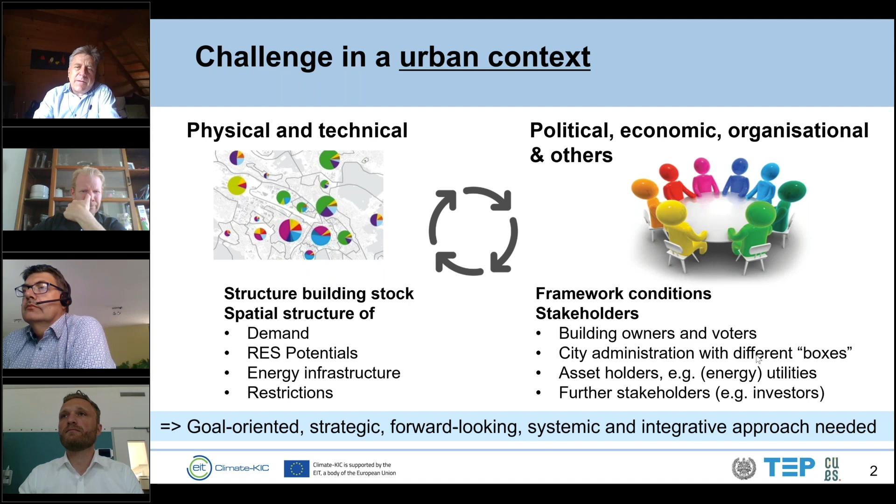If I go to the next slide, so typically, starting in Zurich, but also in other cities, who do you need to bring to the table? Of course, if you have an urban energy planner, it's already good because then you have a certain institutional backup already. If not, it might be worthwhile to think of creating such a position. But on the left-hand side, it's the urban planner, the Department of Construction, the Department of construction permits, the energy utilities, and I think that's very important to think of.

The energy utility that might provide 98% of gas in some countries. How can you bring them to the table so that they see decarbonization not as a threat but rather as an opportunity? You might have other utilities like wastewater, waste incineration. Sometimes they are city-owned, sometimes they're external, but they need to be part of the discussion, part of the solution, as well as the environmental department.

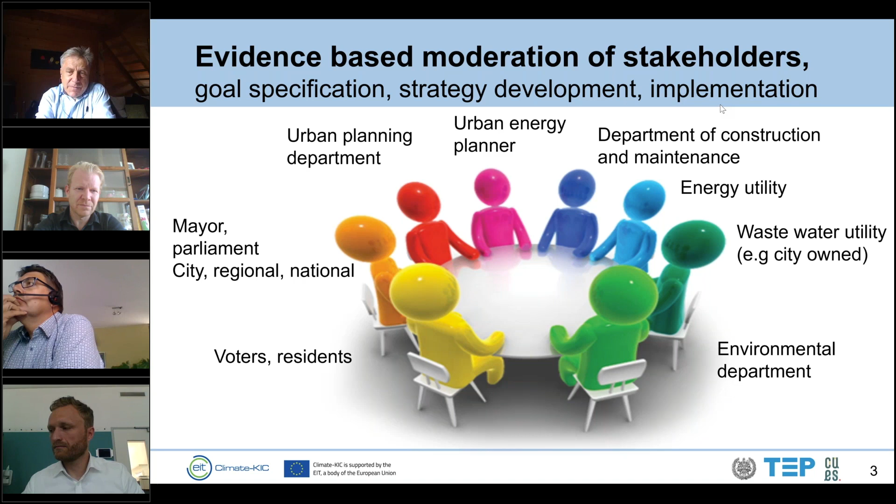They need to foster and emphasize different environmental aspects, including actually the health of the citizens, the local climate. You mentioned it for Vienna, to make also the comfort outside of the buildings good. And if you have all that on the institutional side, then on the political side, you need the voters, the residents. You have mentioned it, Adrian, because they are finally electing the mayor, and only if you can convince them, provide benefits to them, can you implement the advanced policies that are needed to restructure the buildings and the cities, I should say.

So here just an example of the city of Zurich, how the process was then structured. The message here is not that you grasp all the details, but that you need a structured approach. You need to have the specialists that meet maybe more frequently. You need to have the generalists, as we call them here, that in their everyday life have other tasks. But still, if you can interact with the urban planner and make him aware that energy and urban planning might be either conflicting or even beneficial, then this would also foster developments that help make the buildings and cities more green.

And at a higher level, the rhythm of changing things, of approving things is, you don't need to back up every little decision, but at some point you need to back up strategic decisions. You need to back up goals on the political level, including the mayor or even the voters. And this organization has proved to be quite effective in the case of Zurich.

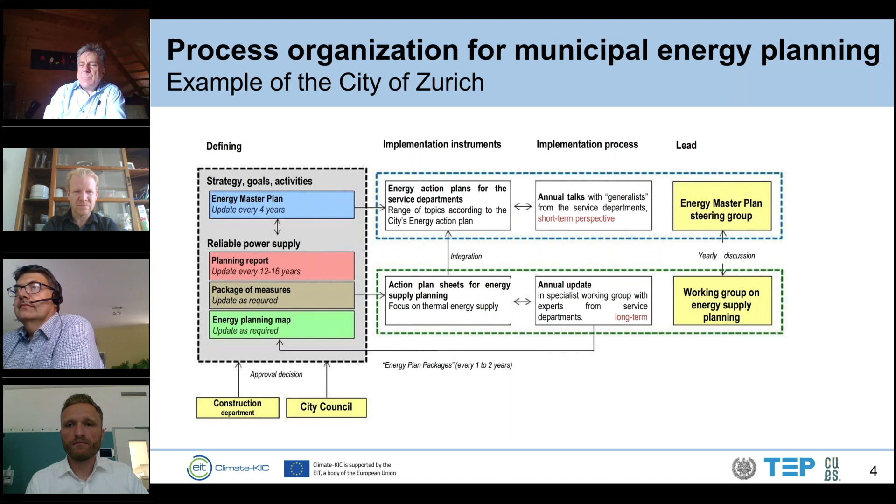It might be quite different in detail in other cities, of course, but the principle is to have a structure to bring the different stakeholders of different departments together, because the silos are not designed to make cities green. The administrative silos are designed for other purposes, but you don't necessarily need to break up silos; you need to make silos work together, I would say.

Then what I call the municipal energy planning, I think again, what is needed is a structured approach. You need distinct products in the end that are really tangible. In this example, it could come out with a planning map, a planning report, and really measures.

That's on the planning side of the medal, and on the right hand side, of course, you need then the implementation. You need the information. You need the involvement of the public. And concrete measures that really make a change are needed in such a process.

And this framework I'm showing here on this slide was developed in Switzerland and applied in many municipalities and cities, and has proved that this actually helps to organize cities around this topic I was mentioning before. And with a clear product, clear methodology, the discussion between the different stakeholders is actually eased, because they can then discuss concrete things.

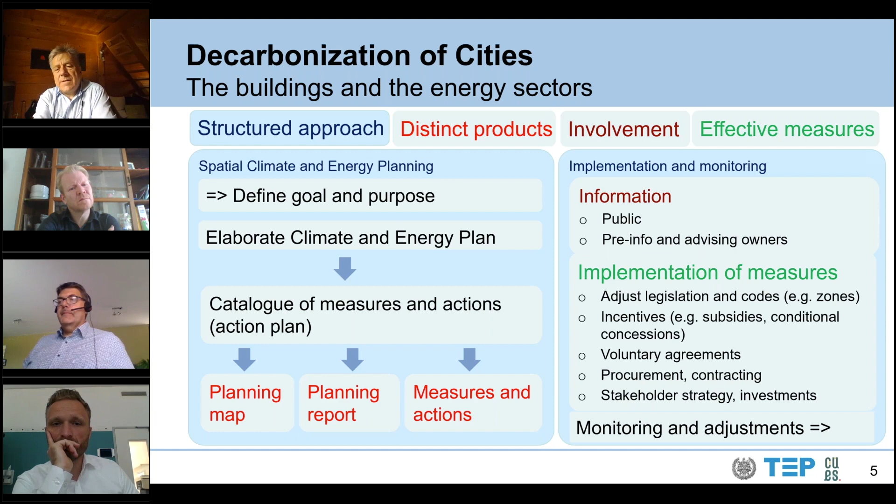Now, if we go to a bit more down to earth issue, I would say the challenge is you have the demand of the buildings on the one hand side, you have the potentials of renewable energies on the other hand side, you have limitations, local availabilities, distances, a certain dynamics also on the demand side. You have population growth, or maybe even shrinking, but rather growth in cities. You have some retrofit activities or not, and all these issues need to be brought together.

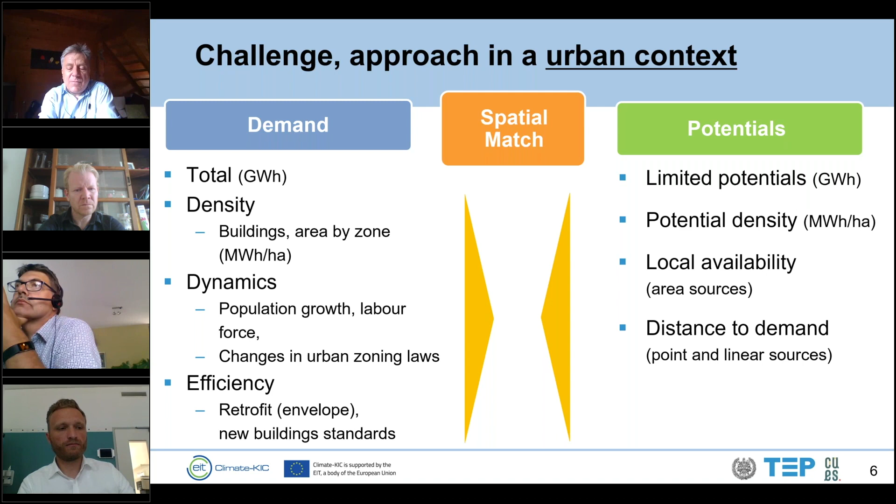And the specific challenge in cities is they need to be brought together from a spatial perspective. A spatial match is needed, and that's why we developed a tool and approach I will show in a minute.

So the approach, typically you have to structure these challenges. First of all, you need to know where you are. Where is your energy consumption, where are your emissions, what is your building stock. Then secondly, and quite early, you need to set a goal, and sometimes you need some fundamentals to define the goal. The goal might be readjusted, but having a goal is very important at an early stage. The goal can be readjusted later on.

Then thirdly, you need a systemic and integral assessment of the demand, of the potentials, and also of costs and benefits, of value creation, of policy issues. So the third part is a really demanding piece of work, but I think it's important that you do it. And based on this, you can then decide on strategic approaches, maybe even reassessing the goals that you have defined in step 2.

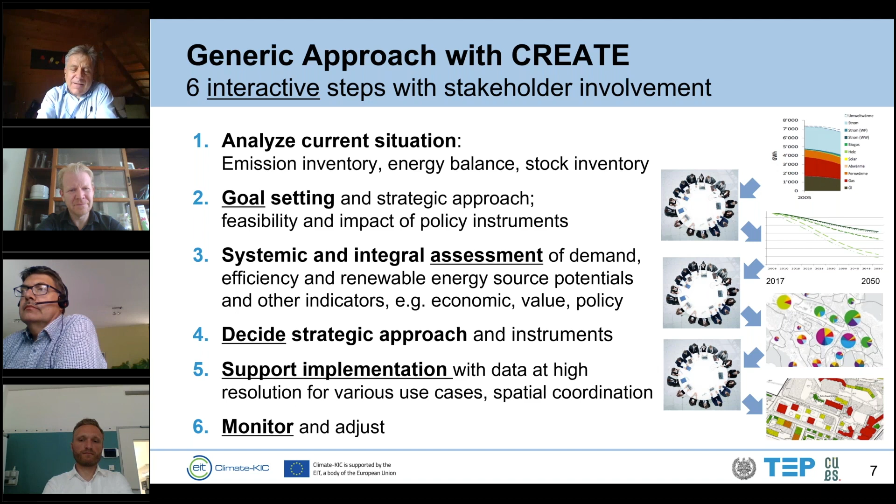Then fifth, it's about implementation, and also there you need tools, data, and the framework to support implementation, and also to monitor as a sixth step. And if in the monitoring phase you realize you're not really on track with the goals, you need to readjust either the goal or the approach or the measures. So in that sense, it's a cyclic and not a linear way of doing things.

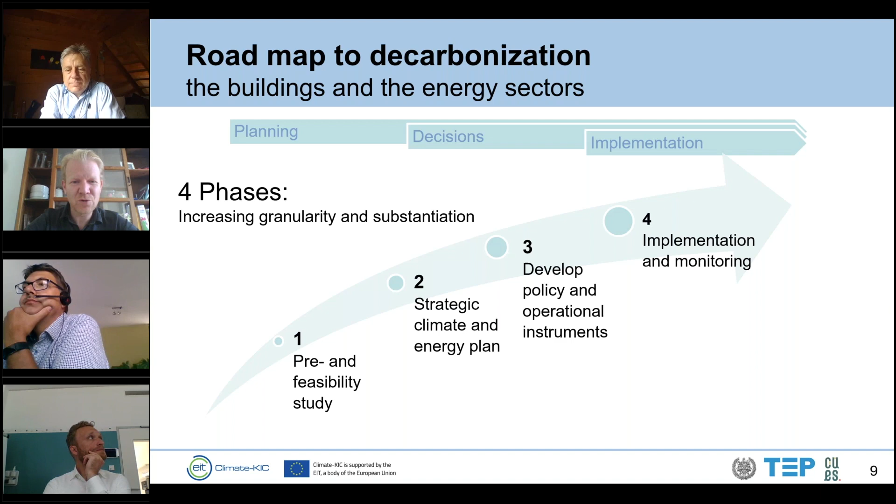It was said already, I think, to reduce the building emissions, the first thing that comes to mind is to reduce energy consumption of buildings. And it's therefore also, of course, no surprise that energy efficiency is very high on the agenda. But I think it's also clear that the challenge is enormous. If you think about the fact that about 35% of the European buildings are over 50 years old, almost 75% of them is labeled as energy inefficient.

Demolition and construction rates are low. It's only about 1% per year. And also the renovation rates are needed to meet these targets, and these renovation rates are currently too low. It's about 0.4 and I think 1% per year, depending on the country. There was a study from the BPIE that to reach the 2050 targets, we need an annual rate of deep energy renovations of about 3% per year. But currently we only achieve like 0.15%, or 20 times less. So it's clear that the challenge is enormous.

The problem is the deep energy renovations that really have a significant impact on the building's energy consumption and emissions encounter a number of important barriers that actually explain, I think, this too low renovation pace at the moment. So first problem is that these renovations require, of course, a large investment, and this is a problem if the money cannot be found. But even if the money can be found, then you often see that the overall payback time that is achieved with the energy cost savings is very long.

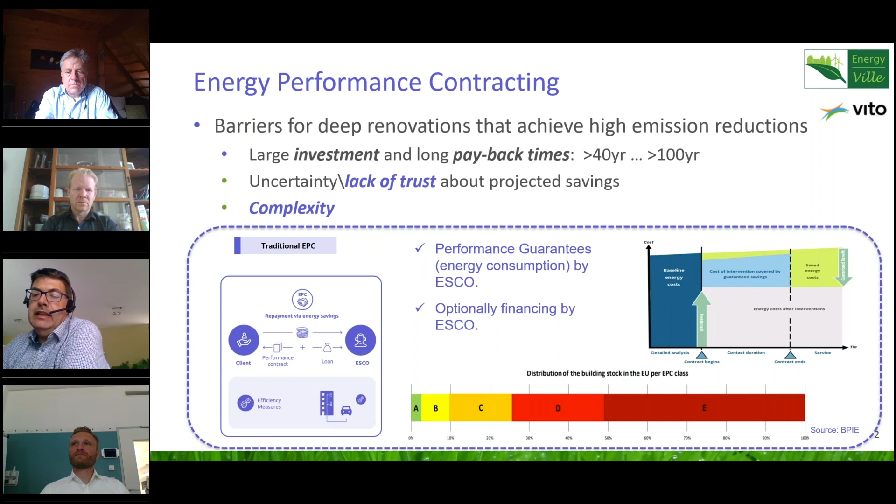So although this EPC practice is solving some of the problems, it's not addressing at all the barriers related to the high investment that's needed and the long payback times, which also explains probably why this traditional EPC practice is mainly targeting public buildings, where this apparently is seen as less of a concern.

But to address the barriers that are specifically related to the large investments and the long payback times, we are developing something that we call the active building EPC concept and methodology in the Ambience project that started 1 year ago. So what I'm talking about here is still work in progress. The key idea behind it is that reducing consumption is actually not a goal on its own, but that reducing consumption is a means to reach the real goal. And the real goal is to reduce emissions.

And as already also talked about in the questions before, emissions can be reduced not only by reducing consumption through increasing energy efficiency, but emissions can also be reduced by electrifying heating and electrifying domestic hot water generation, which, by the way, roughly account for 75 to 80% of the average European household energy consumption. So it's quite a lot.

Just to give a figure to illustrate that, an emission reduction of 85%, of course, you can achieve by reducing the consumption by 85%. But you could also reach the same level of emission reduction by reducing consumption by only 40% and achieving the additional 45% by means of electrification.

Electrification can reduce emissions because the carbon intensity, that is the amount of CO2 emissions per kilowatt hour of produced heat of a heat pump, in most cases is much lower than when that same kilowatt hour heat is produced in a traditional manner with gas.

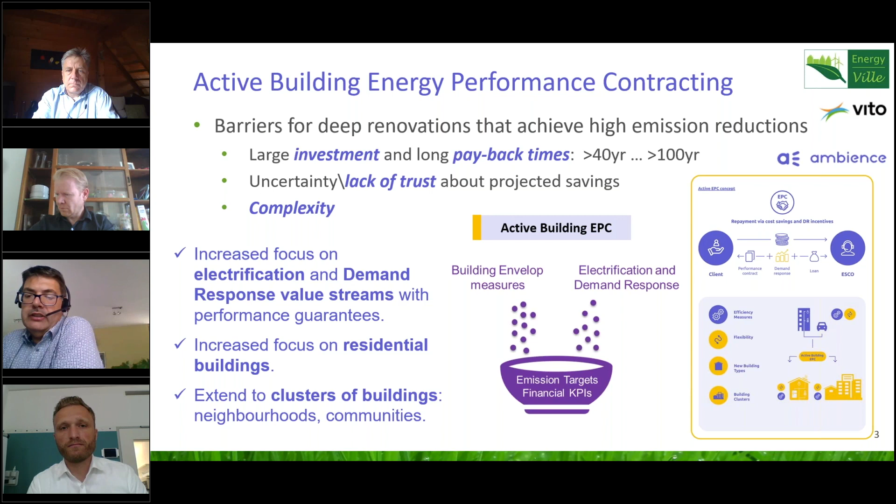The active building EPC performance concept methodology follows largely the same three phases that can be seen in a traditional EPC concept. So there is a pre-contracting phase where a quick scan and high-level potential business case analysis is done. And for the active building EPC concept, specific checks are introduced to explore the presence of flexibility and the willingness to electrify and allow demand response active control.

If from the pre-contracting phase we see that there is a potential business case, this is further analyzed in detail in the contracting phase. And in this phase, multiple design options for multiple scenarios are explored in order to find the optimal set of measures and to quantify also the corresponding business case, including all relevant financial and economic KPIs that come with it.

For this active building EPC concept in this phase, it is important to be able to model the available flexibility of the building and thereby to estimate the impact of demand response active control. And this is, as I said, important because the energy cost and emissions are impacted also by the capability to shift the electrified consumption to times when the emissions or the costs are the lowest, or where incentives can be earned by offering services to grid market stakeholders.

And this must be done in such a manner that these performance estimates are linked to agreed scenarios for which then also performance guarantees can be given, which is important to reduce the risk.

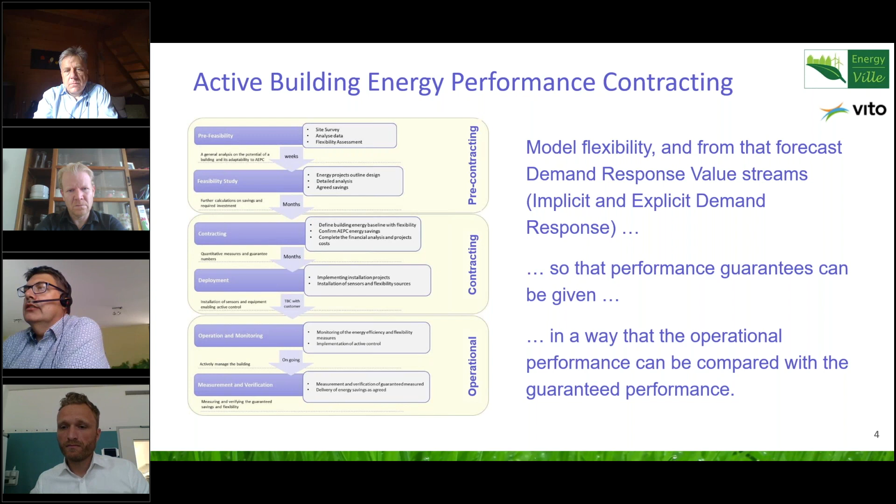If after a successful contracting phase an active building energy performance contract is signed, we enter the operational phase that starts with the deployment of all the agreed measures. Then the performance of the building, of course, is monitored and the demand response active control is applied. And at agreed times, like in the traditional EPC, the operational performance is compared against the performance that was guaranteed based on the agreed scenario.

To support this contracting phase, we are developing the active building energy performance modeling tool, ABEPEM for short. The main component of this tool is the energy cost cash flow calculation component that is able to estimate the energy consumption profile, and from that the emission profile and energy cost profile for a given building design. This is a specific set of proposed measures and a given scenario.

And as I already said, these estimated profiles are impacted, of course, by the demand response active control decisions that are taken. The estimated energy cost profiles then serve as input for the financial and economic calculation component that uses the CAPEX and OPEX information and other relevant information to calculate the relevant economic and financial KPIs that go with the proposed design.

By using this tool, it's possible to explore multiple design options and explore multiple scenarios, and this way propose the most appropriate design option along with the performance guarantees that can be given for that option, again linked to an agreed scenario.

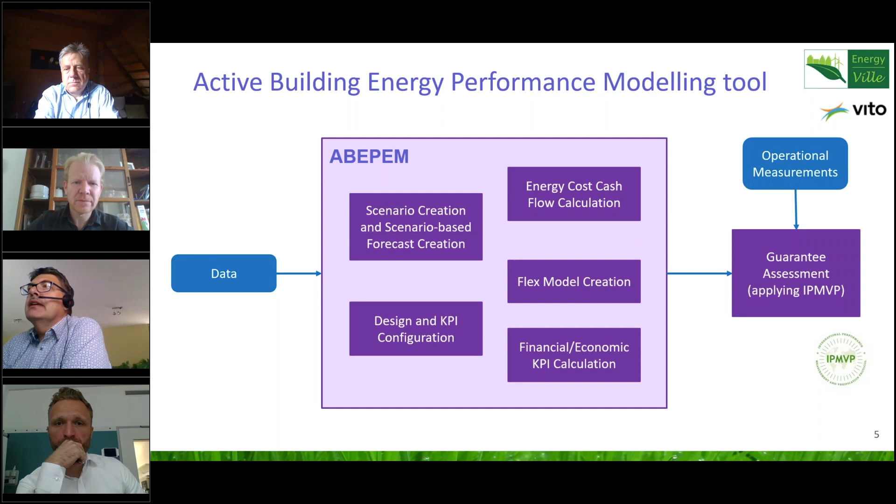That's great. Chris, I'm just going to ask you to wrap up quickly if you can, okay, so we can move on. I'll speed up a bit. So I'll not go into more details about the exact functioning of this tool then.

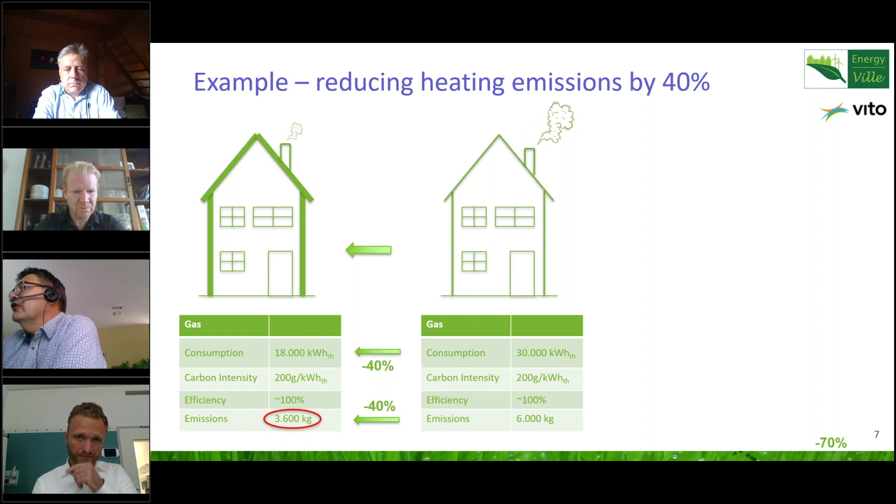Maybe very briefly, a short quantitative example is that to reach a certain emission reduction by 40% at the left side, you can do that by reducing your consumption by 40%. You could also achieve the same reduction by electrifying and using some data available on the efficiency of heat pumps and carbon intensity, where it's also shown here that if over time the carbon intensity decreases and, let's say, halves, you can achieve a much higher reduction of the emissions.

Of course, with electrification, usually the OPEX cost increases. So that's one of the balances that must be made. What's the reduced investment in CAPEX? What's the increased cost of OPEX? And what's then the sweet spot? So what's the best combination of measures?

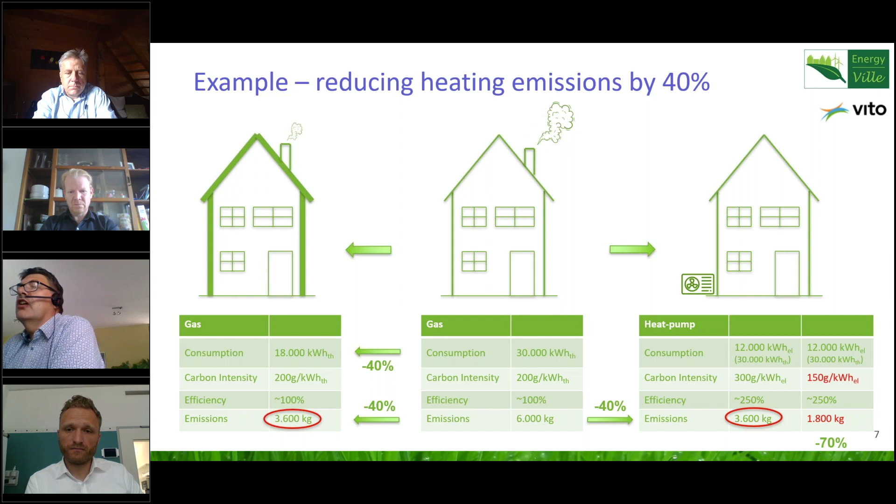Including also adding local generation and demand response active control is necessary to really create a positive business case where, again, you get this best balance between investments in building envelope measures and in electrification measures combined with active control.

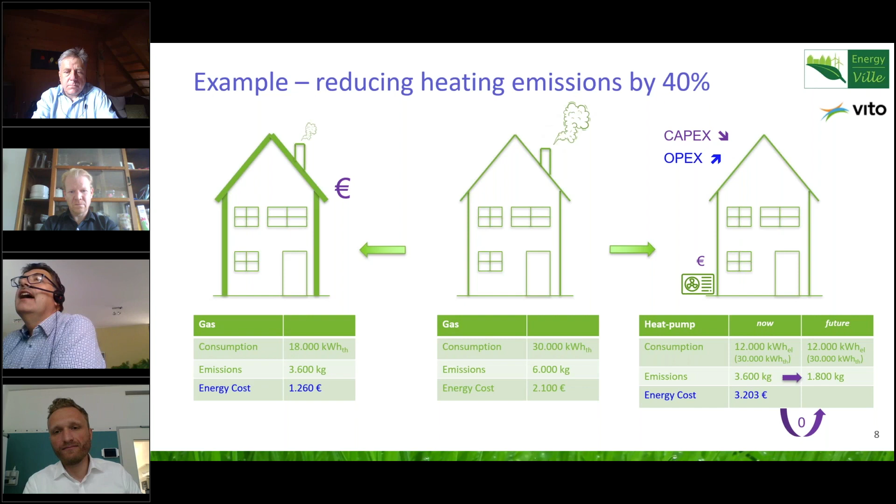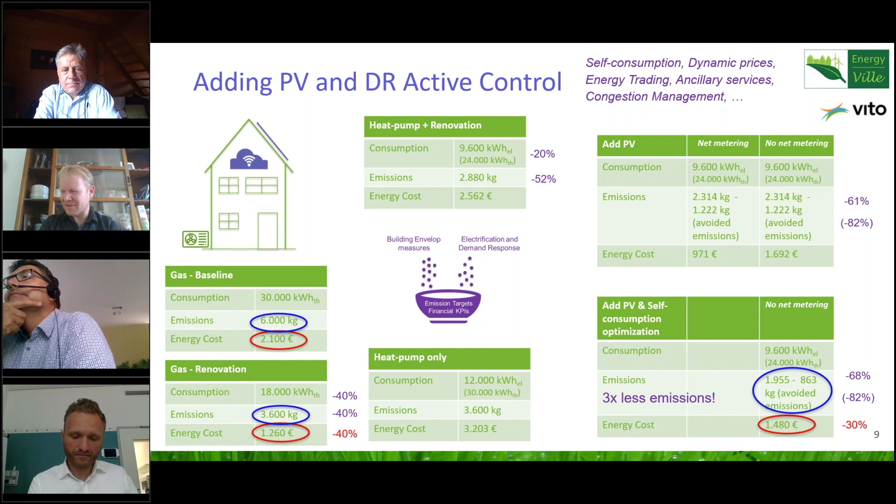Yeah. Apologies for the time overrun. That's all right. It's a really compelling thing, and I think certainly for homeowners such as myself who are looking to do this, it's an exciting thing, and I look forward to seeing the conclusions of the project. Steffen, if I can ask you to take us away with our last presentation of the day, please. Okay, just give me a second. Okay, now you should be able to see my screen, right? Adrian, can you see me? I can indeed. Perfect.

Okay. Our solution, I think Martin already said it, is about this whole thing of evidence-based moderation of stakeholders, bringing everyone together to improve the communication and the flow of information within the project. And I already mentioned that we see this as a very crucial aspect for convincing developers to build green buildings.

And why is this important? You know that 80% of the cost of a building is happening during operation, right? Only 20% is planning and construction. But the impact or the setup of these 80% is defined in the really early strategic planning phase. So when everyone gets together and designs the strategy and the draft of the building, in that moment, we define 80% of the total cost of the building.

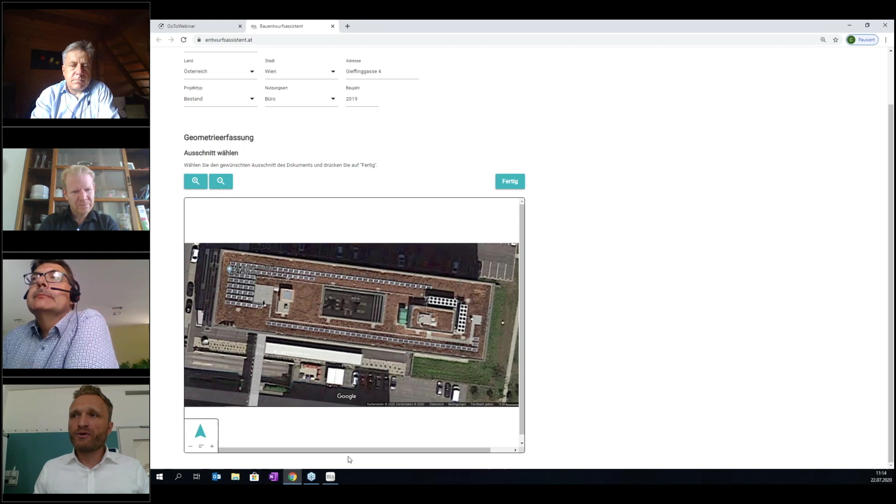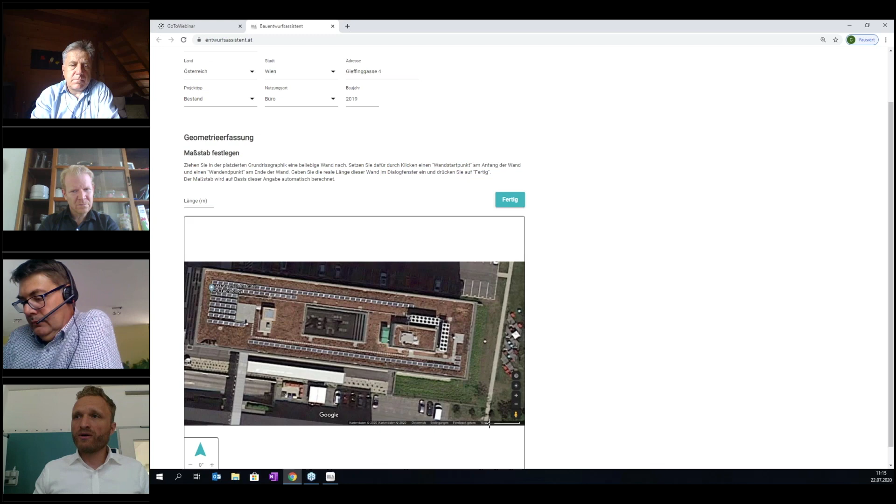So then we import any photo that we have. We have a Google Maps photo here, or you have an architectural draft. It really depends on what is available. We are using Google Maps now. So we set this up. Then we just set the scale. So we know this is 10 meters here. We get the information from Google, otherwise you get it from the architect. And then we can already start to design the shape of the building. It's very simple. We can just follow the outside shape and say these are the 4 outside walls.

Then we give some basic information like the height of each floor. In this case, it's 4 meters. It's an unconditioned floor area. And then for each single wall, we can say what is the share of window, the share of glazing. Does it have a balcony or not? Is it connected to ambient, or is there any building that is adjacent or connected with it? In our case, it's not. So the share of windows and also the window height. These are the few data that are needed just to set up the architectural draft.

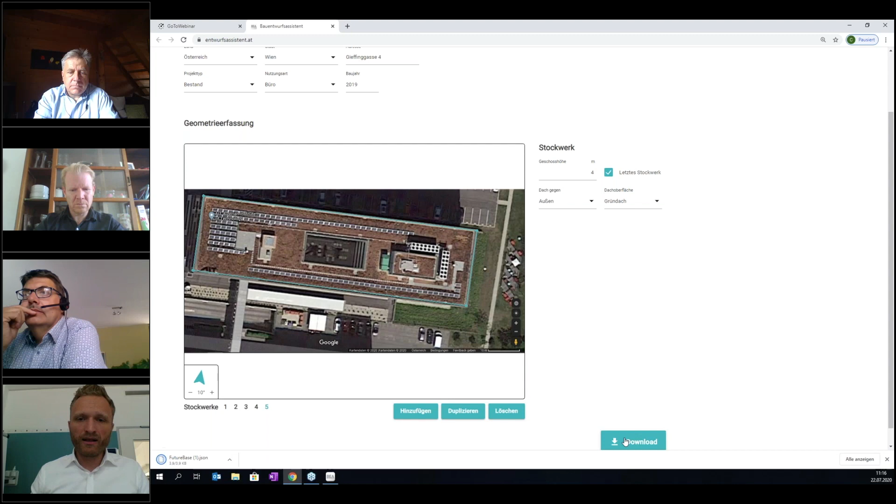And then if we have more than one floor, we can just duplicate them. In our case, we have 5 floors. For the last floor, we have to say it's the last floor, and it's against ambient, and we have a green roof, and that's it. Of course, every floor can be set up differently, but now we download this model, we can share it, discuss it with architects, send it to our developer, but that's basically it. So very simple, hopefully it only takes 5 minutes to set up a building.

Then the developer can import it, gets sent this model by the architect or whoever. We import it and start the calculation. In our calculation, you see we have imported the model now with very brief project infos, and now we can change the building standard. We can say is it actively cooled or not. We can change the demand temperatures for heating and cooling, and we can also set up different technologies. I apologize again, this is in German, but we have gas boilers, district heating, different kinds of heat pumps, and we also have a block-powered CHP.

So the standard technologies are included, and the developer can change them, or you can sit together with the architects, with the technicians, and really exchange ideas. You can change the outside shape if you want. If you have good information, you can use the correct U values and G values.

Otherwise, we have implemented the latest building codes of Germany and Austria. So depending on the location, if you're in Berlin, Hanover, or Vienna, like we are, the relevant building code is imported, and the values are set up here. And also you can choose different kinds of shading. We have implemented outside shading, inside shading, no shading, and some shading foil. So there are different options for shading.

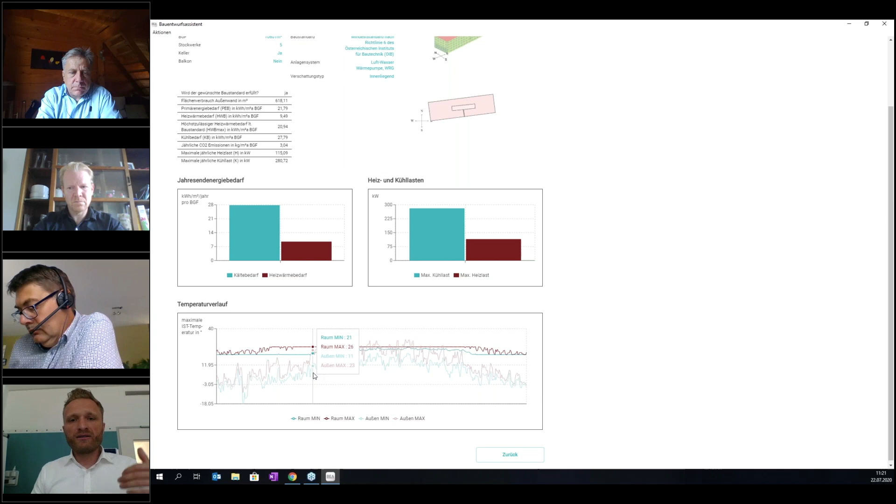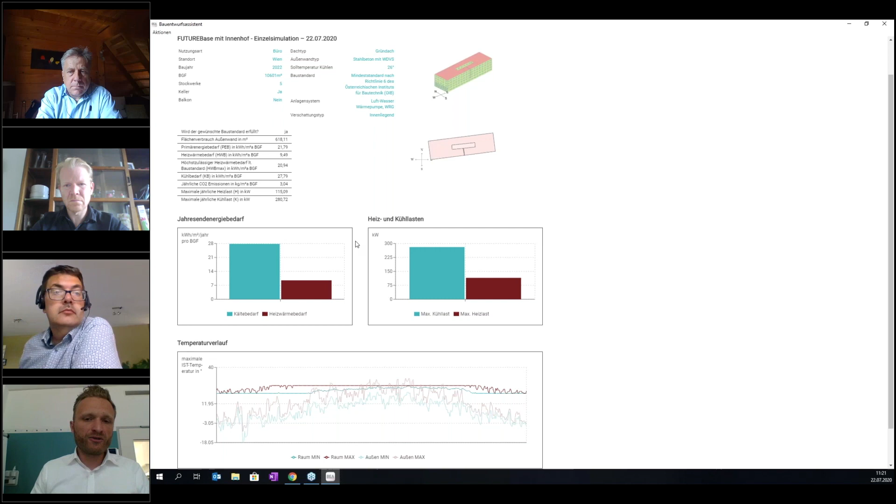Stefan, I've lost audio from you.

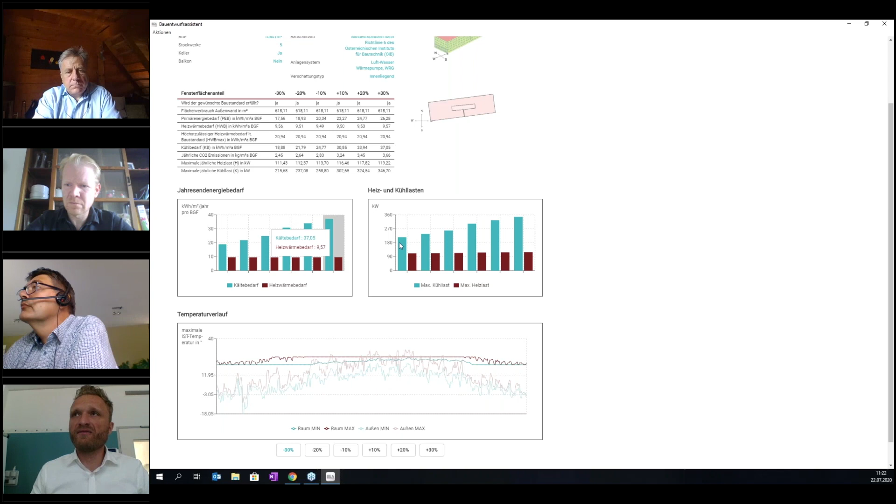And that's basically it. Also, as I mentioned, there is the opportunity to really do variant calculations, as we see here. Of course, if we change the window area, the window area has a big impact on the energy demand for cooling, but has almost no impact on the energy demand for heating. So we get a lot of good results and information based on very few data.

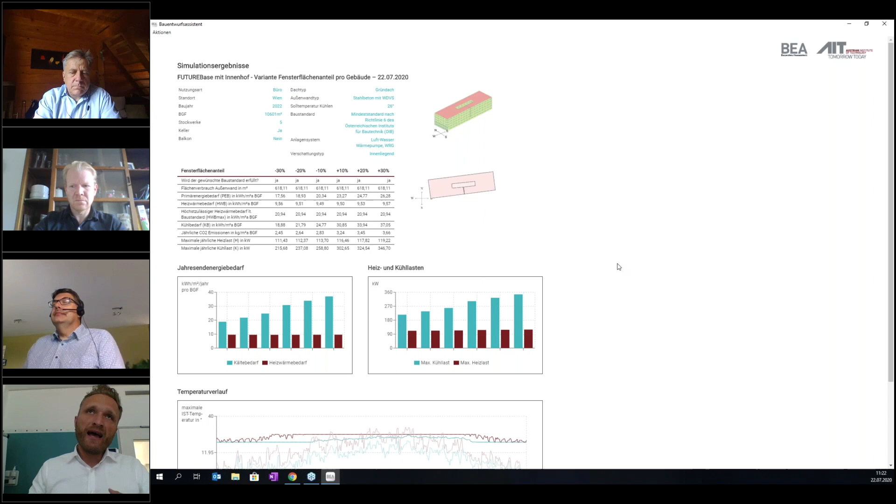And we think this is really crucial in really getting one step forward and, it's not convincing, but helping developers and decision takers to take better decisions, take more informed decisions, and to speed up the conversation between the architects, the owners, and the technicians, to really bring these different perspectives and aspects together with very little information, in a really short time.

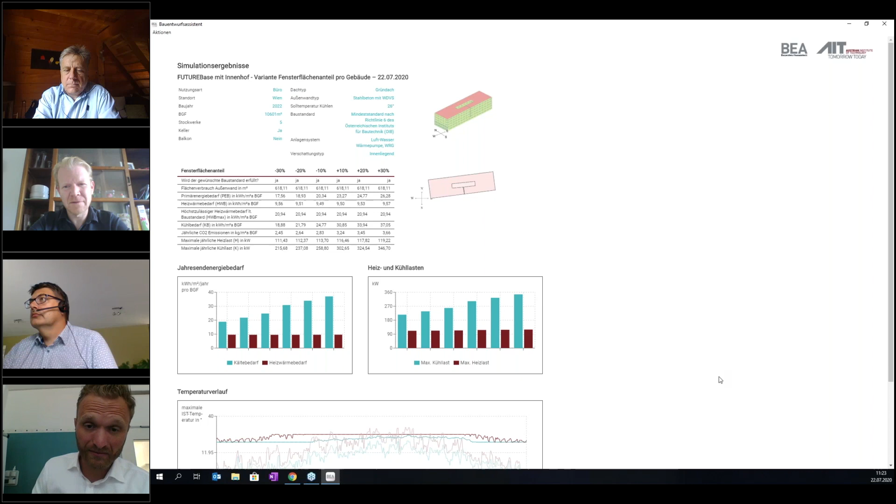So that I think is very important, because okay, you can always do a big study, and a big calculation takes weeks and costs a lot of money, but we think information must be quick and easy to access, and that's the idea, and we hope we are able to support this with our tools and services.